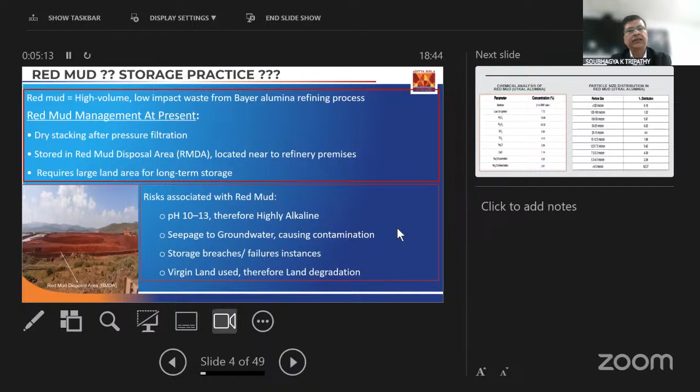Now to give an idea of chemical composition as well as particle size distribution, the characteristics of red mud show high iron content, almost in this Utkal sample case, 60% almost, sometimes plus 60 also. Al2O3, TiO2, SiO2, all these are there. Now the culprit is Na2O, which is around 2.84%, and I've shown the leachable and non-leachable portions.

It contains, after filter press, almost 22 to 25% moisture. Now the particle distribution shows 62% plus is less than 4.5 micron. Almost 90% is less than 75 micron, which shows it is quite fine-sized grain particles.

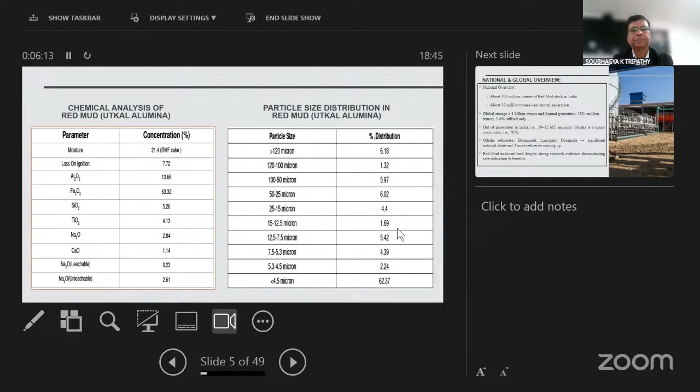Just to give a national and global overview, around 100 million tons of red mud is stockpiled in the country till date. 12 million tons generation generally happens across the country, where Odisha accounts for around 70% of this quantity. There are 3 refineries, Damanjodi, Lanjigarh, and Utkal Alumina Doraguda, and 3 more are already announced coming up. Global storage is huge, 4 billion tons, with annual generation of 180 million tons.

Only 3 to 4% is getting utilized, so which shows there is a concern. A lot of experiments and pilot studies are happening, but still there is low use.

But Hindalco has taken a lot of effort in this, and I will be proud to announce before this audience that out of 4 refineries, our 3 refineries, excluding the Utkal plant, are making 100% red mud utilization since the last 4 to 5 years. This has happened due to the COVID scenario and other incidents earlier. So cement plants are now catering to the maximum quantity of red mud for utilization, therefore all our 3 refineries are able to send it there.

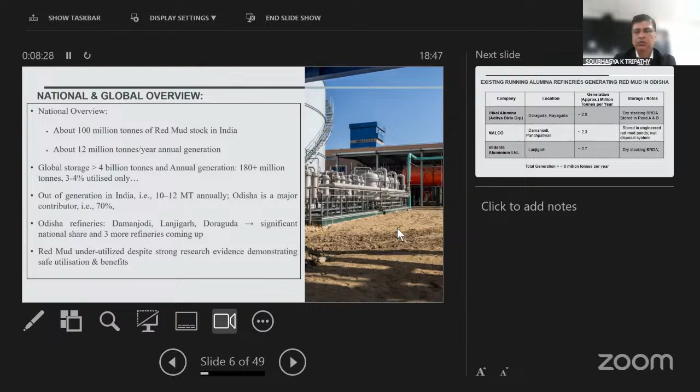This Utkal plant is remotely located, logistics is a challenge and many other things. Therefore, Hindalco is exploring other opportunities like mine backfilling, taking it back to the source where we got this mud, and also road utilization. Why these two, because the quantity is so much, we need some bulk utilization - bricks, some pavements. There are a lot of areas globally where uses are happening, but particularly these 2-3 uses will consume the maximum quantity, so we are putting thrust and emphasis on these type of uses.

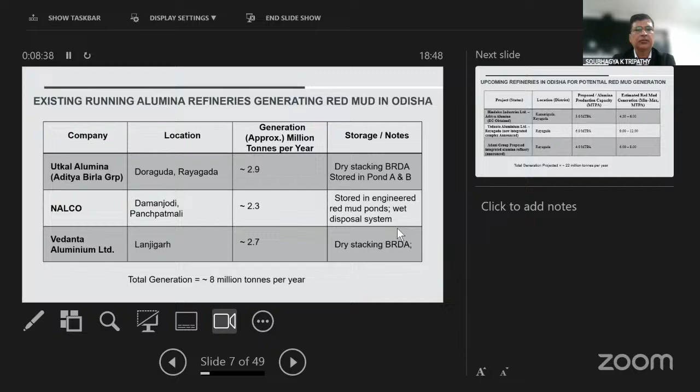Now, as I was describing, the 3 refineries are generating almost 8 million tons per year in the country, and it is projected to go up to 22 million tons if one refinery in Hindalco brings up a second one at Kansariguda, and Vedanta's new integrated complex which has been announced, and Adani Group if they come up, so it is going to increase further.

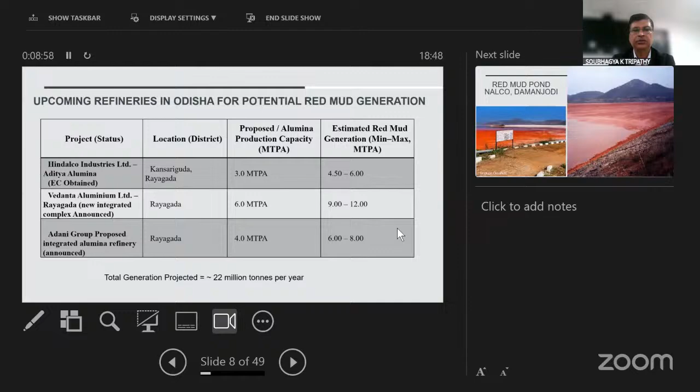Before I go into this opportunity of utilization, just to share these few photographs of Nalco, Damanjodi, where this was getting stored in slurry form. This was the practice earlier, almost all refineries. In Hindalco also, in Muri, Renukut, initial period of Utkal, they also did it like this.

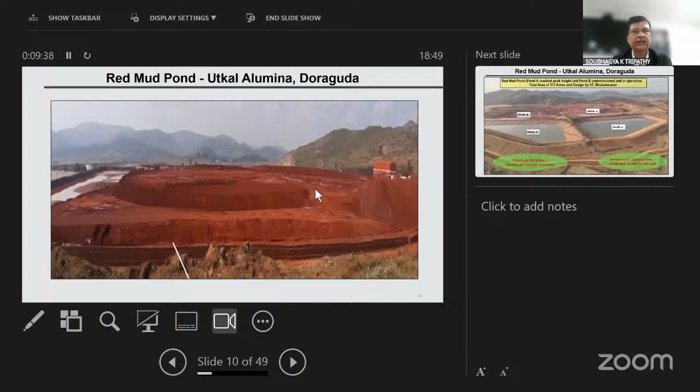Now, this is the storage happening at Utkal, dry stack storage. You can see there is a filter press at the northeast corner, and from there this dry mud is getting generated. Just giving a picture of this red mud storage area, drone view - around 500 acres of virgin land is consumed.

So there are 2 storage ponds, pond A and pond B. Pond A has almost reached the height, and pond B is again in process. To collect this, pond C is collecting the leachate, and that gets collected and taken to the plant for reuse in the process. Pond D is only a freshwater pond.

Now this Utkal plant, likewise all the 3 refineries, uses pressure filtration, which gives us the maximum caustic recovery, which is virtually the money - our investment gets recovered. So there is also many other risks associated with this storage.

Therefore, geotechnical stability tests are conducted at regular intervals. IIT Bhubaneswar, and in the initial period Golder Australia, were involved in designing this red mud storage, because there are many bad incidents which have happened earlier globally.

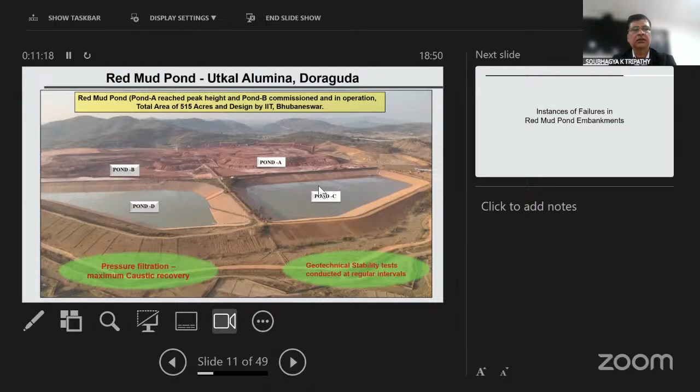So now what I'm going to show is this storage - this Utkal plant a few years back. There are old plants which again have red mud storage and concerns. This is going to pile up and increase, so instead of just storing it, our efforts have to be on getting other opportunities on how to maximize this utilization. That's my objective to present over here.

Like 2 instances, many are aware, but I'll just show - when in Hungary, one incident, a red mud breach happened where 10 people died, 150 injured.

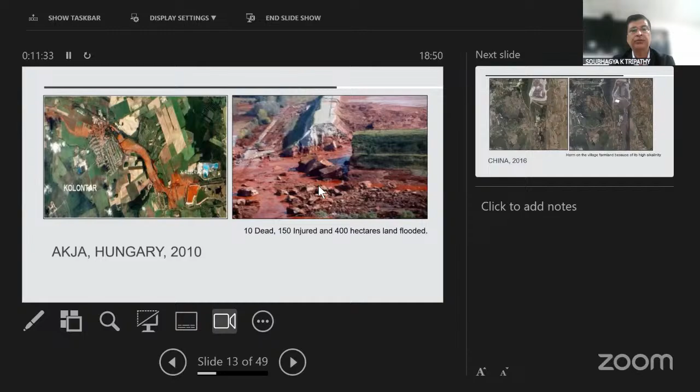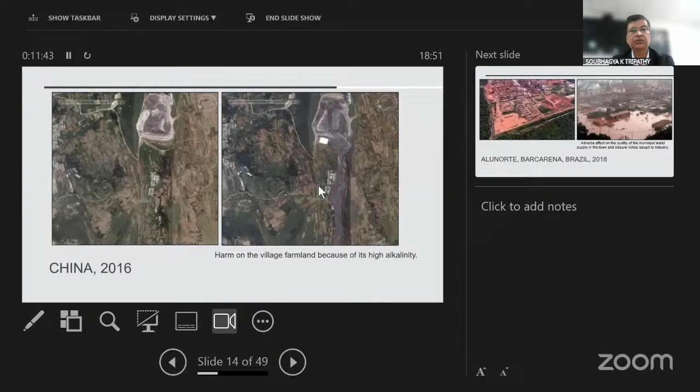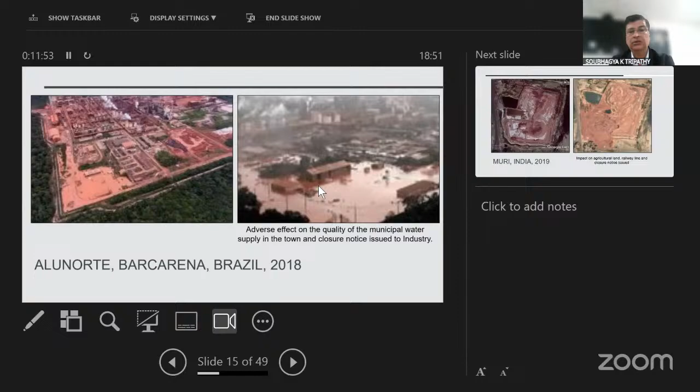Unfortunately, in our country also, Muri happened. But practically, there was no damage happening. There were concerns raised that a few agricultural lands could be impacted.

This brought a turning point in HINDALCO's approach and strategy to utilize red mud 100%. After this incident, 3 of our refineries made all efforts to utilize it in cement plants, including Muri. Muri survived and is now running well, 100%, even 100 plus, because the storage is also now being taken out.

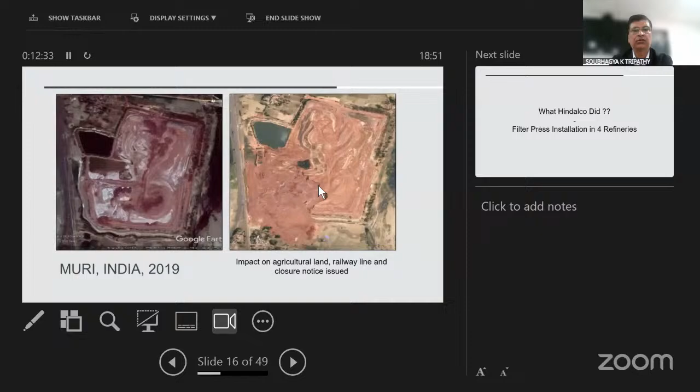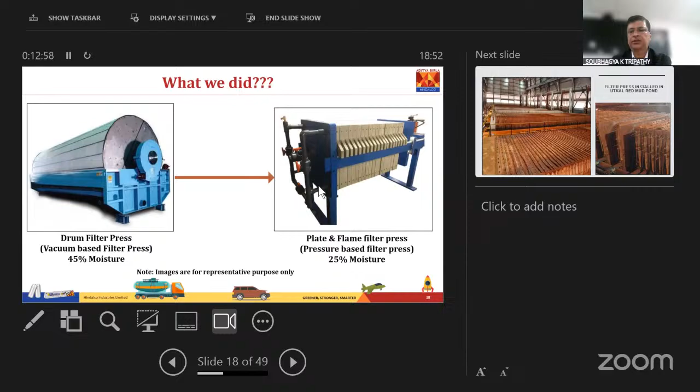So, turning this challenge into an opportunity, HINDALCO installed a pressure filter concept. Like the drum filter press, around 45% moisture was there in case of Muri, Renukut. It was completely revamped and changed into pressure filter form, where maximum 25% moisture will remain. Once moisture is reduced, it comes out in cake form.

Now you can see in the Utkal plant, and same in other refineries, these are the pressure filters with pressure plates. Red mud slurry passes through, and the membranes, these pressure plates, separate the solid and liquid. The caustic is collected and taken back to the plant, and the red mud comes out in cake form, going to the storage area. That's the practice happening now.

This change brought maximum caustic recovery up to 60%, reducing moisture from 60-65% down to 25%, which has brought in a lot of innovations like using it in roads and backfilling. These ideas came up, and many things were happening globally too. A lot of efforts went ahead, and it has clicked here.

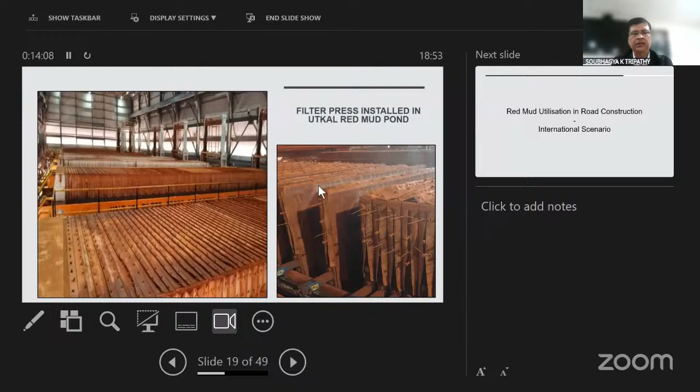The International Aluminium Institute has also recognized HINDALCO's efforts and published special volumes on how HINDALCO could change the scenario in utilizing red mud in 3 refineries to 100%.

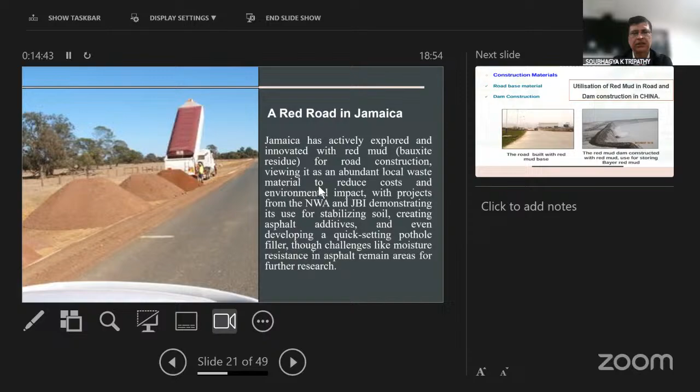Now I'll share a few global instances of red mud utilization in road construction. In Jamaica, they have made a lot of experiments in road construction, because they have abundant local waste material, resulting in cost reduction. There are a lot of publications, and in Jamaica's case you can see a success story on this road utilization.

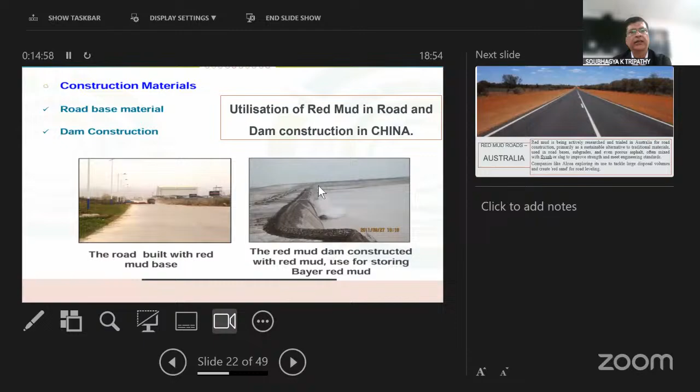In China also, they have used red mud base in dam construction - these are available online. In Australia, Alcoa has made efforts to actively use it, with a lot of trial utilization going ahead, particularly combining red mud with fly ash, which has clicked well and has more strength than using red mud alone.

In India, particularly in Odisha, red mud is successfully utilized in subgrade, subbase, embankments, and other permutations like stabilizing through fly ash. The performance of these roads is comparable, even superior, to soil or murum and other materials used in conventional roads.

So now the opportunity is that Odisha is expanding its infrastructure network, and natural resources like soil and murum are scarce. If anything could replace these materials, it's always a welcome step, and government authorities always encourage it.

I have found it - in Utkal Alumina, I would first cite this red mud used in roads. It was happening in piecemeal sections in many industries, but in case of Utkal, particularly HINDALCO plants, trial road use happened in Utkal and Muri, and the Indian Road Congress has issued accreditation to this use.

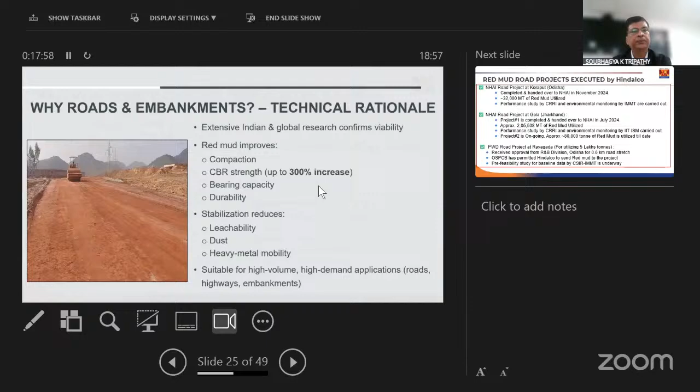These are the instances where HINDALCO has made efforts. I think other industries are also simultaneously making efforts. Like, as I said, the NHAI road project at Koraput, around 32,000 tons of red mud we have utilized, and this is completed, handed over to NHAI in 2024. The performance study has been done by the Central Road Research Institute, and environmental monitoring, baseline and subsequent monitoring, is happening through CSIR-IMMT, Bhubaneswar.

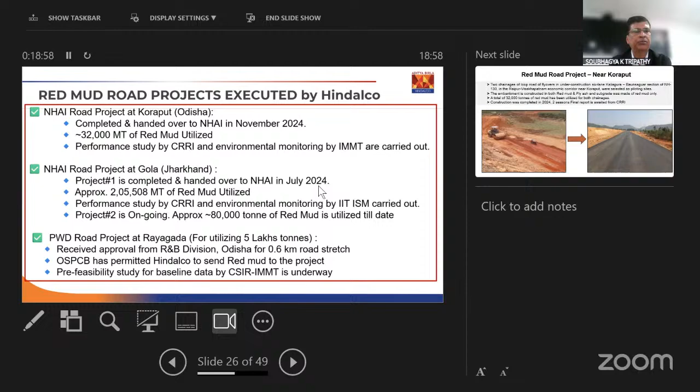Now, the NHAI road which is happening at Gola, Jharkhand, around 205,000 odd tons of red mud is utilized. Second patch, around 80,000 has gone, so that is also under progress. There is a PWD road near Rayagada, with an estimated usage of around 5 lakh tons. So that is also coming up, for which we have received permission from the Odisha Pollution Control Board. Pre-feasibility report and other things are completed, that is going to come.

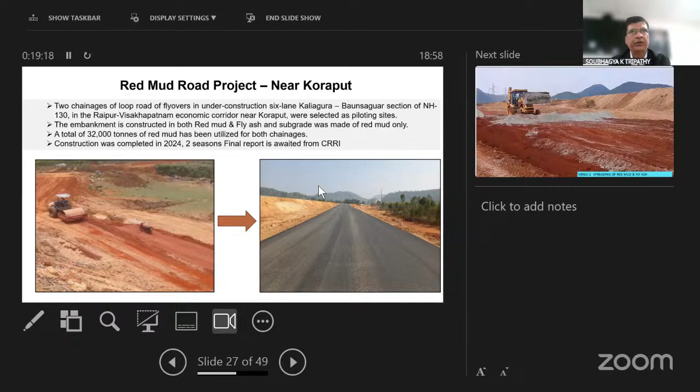Now, this case particularly, which is completed, is near Koraput, 2 chainages around 500 meters of length. So you can see the road before and after. There are 2 types of uses: one is subgrade use and another is embankment. A few photographs I will show one by one. You can see the laying of this red mud, and particularly this patch, we had to mix with fly ash and made another experiment to prove red mud with fly ash, and all design, performance monitoring, and guidance is by the Central Road Research Institute.

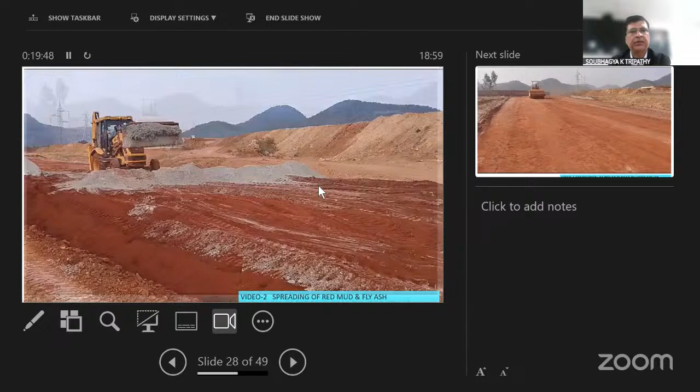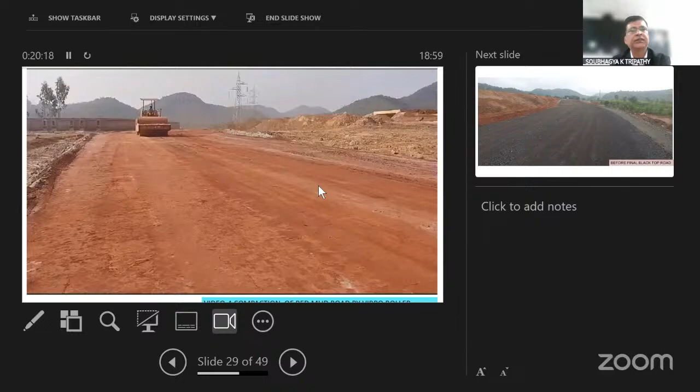Then you can see this compaction happening through vibro compactors around 8 to 10 times. One layer, let us assume 300 mm, will be laid through this JCB. Now with compaction, it almost comes down to 250 mm. 8 to 10 passes; the machine weighs maybe 8 to 10 tons, and then again it will give vibration. Likewise, one 250 mm layer will complete, and then the NHAI team will come and measure the performance. One is compaction strength that they will measure, and optimum moisture content also.

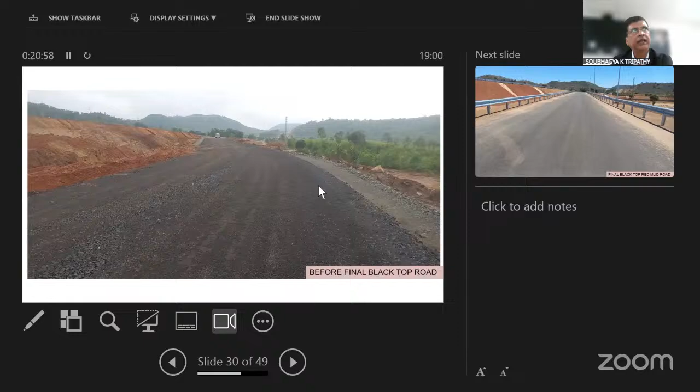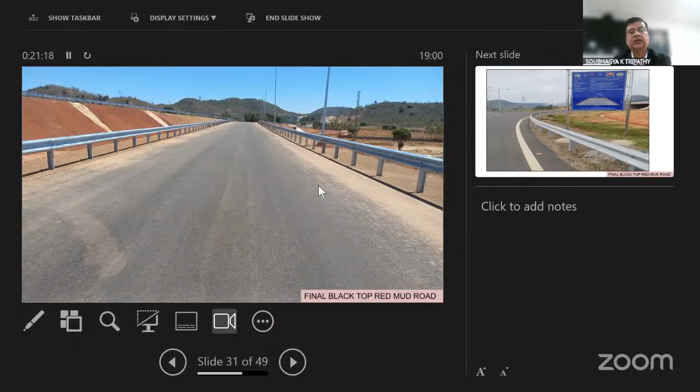This experiment is very carefully done with a particular moisture content. It works well. The OMC is coming around 19-20%. Here I was just sharing with you 20-25% after pressure filter recovery. Now if some drying up happens, then the whole strength and compaction works well. And you can see the final road, with the display board by all these authorities.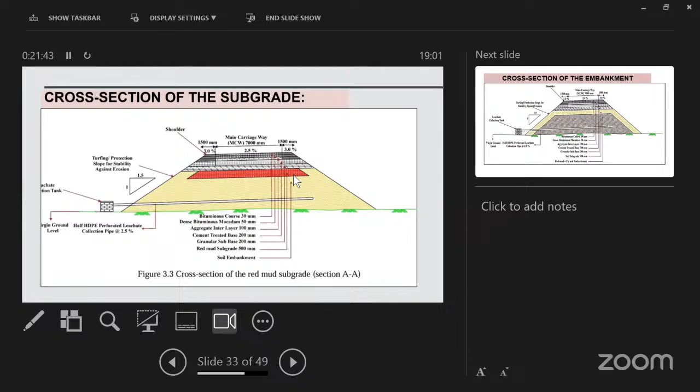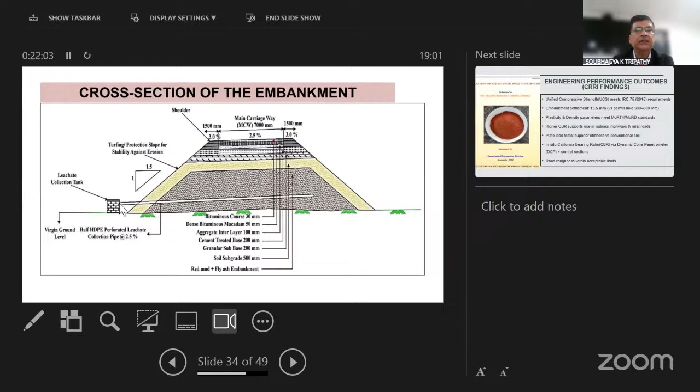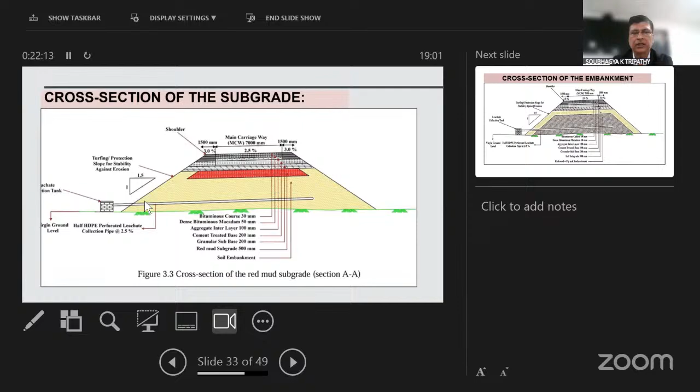Now, the engineering performance coming out of this experiment from CRRI: the UCS, Unconfined Compressive Strength, meets IRC guideline requirements. Embankment settlement is much less than permissible, 300 to 600 mm permissible, but max is 13.5. Plasticity and density parameters meet MoRTH, Ministry of Road Transport and Highways, and MoRD standards. Higher CBR supports use in national highways and rural roads.

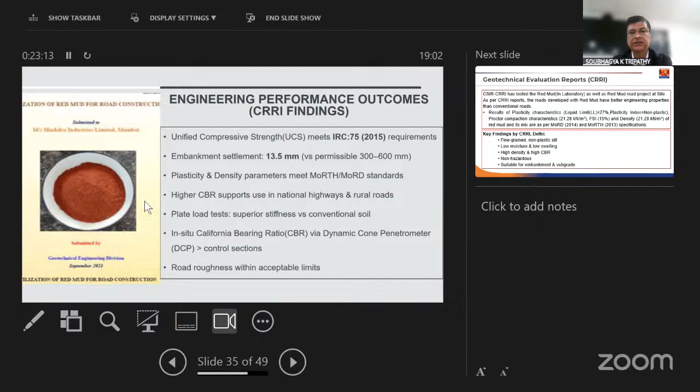Plate load tests they also conducted, showing superior stiffness versus conventional soil. In situ CBR and dynamic tests, like DCP, dynamic cone penetrometer, are much higher than control sections. Road roughness is also within acceptable limits. There are also a few more geotechnical tests they have done, like liquid limit, PI, FSI, and lots of other things.

So key findings by CRRI Delhi: red mud is fine-grained, non-plastic silt, low moisture, low swelling, high density, non-hazardous, and suitable for embankment and subgrade. That's the recommendation coming from CRRI.

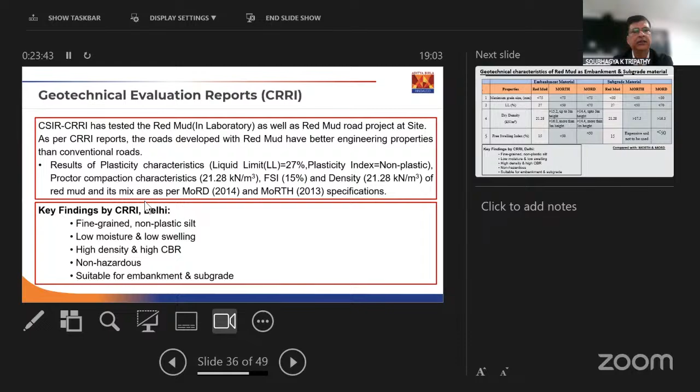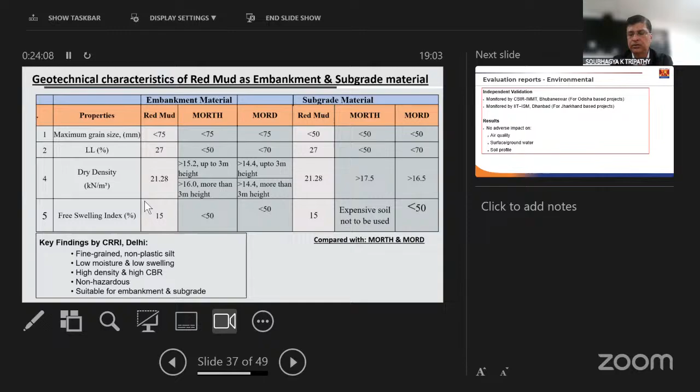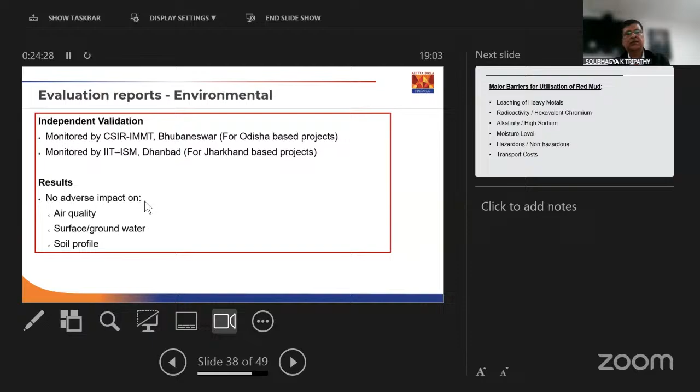Now, coming to the next concern, which is environmental. Generally, regulators see the risk associated, as I told earlier. So we have to be careful to assess what is happening here. The independent validation happened by CSIR-IMMT Bhubaneswar and IIT ISM Dhanbad. They have stated that till date there are no adverse impacts on air quality, surface and groundwater, and soil profile.

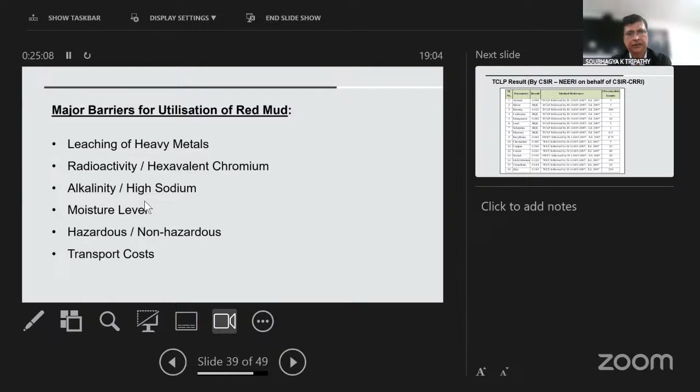So what is the major barrier? Why does red mud take so much time, so much storage, and it continues for so long? What is the major barrier? One is leaching of heavy metals. Once we figure out the challenges, then we can go to the solution. So we have analyzed each of the constraints, and I am going to describe how we have attempted to make it at least towards foolproof.

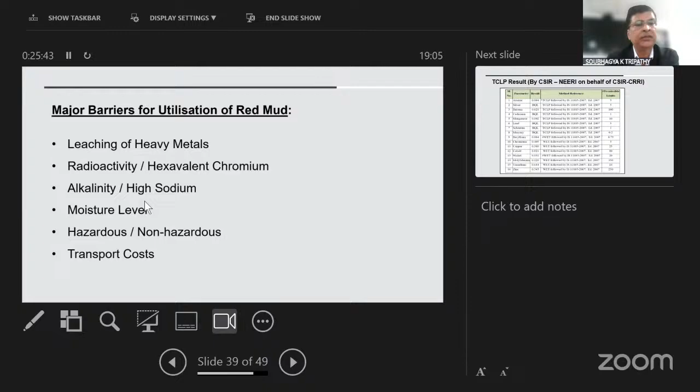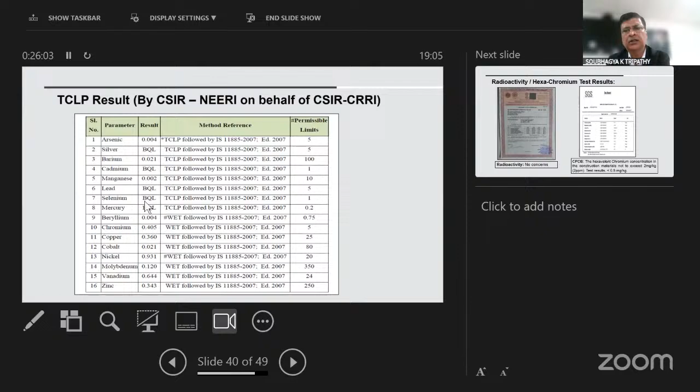Leaching of heavy metals, any radioactivity or hexavalent chromium, alkalinity like high sodium content, moisture level, whether it is hazardous or non-hazardous, and the economic sense, the transport cost. That's the biggest challenge. Now, the TCLP results, which CSIR-NEERI have done, said there is no concern for leaching of heavy metals. We have conducted many other tests in many laboratories. So heavy metal leaching, particularly after compaction, has no chance.

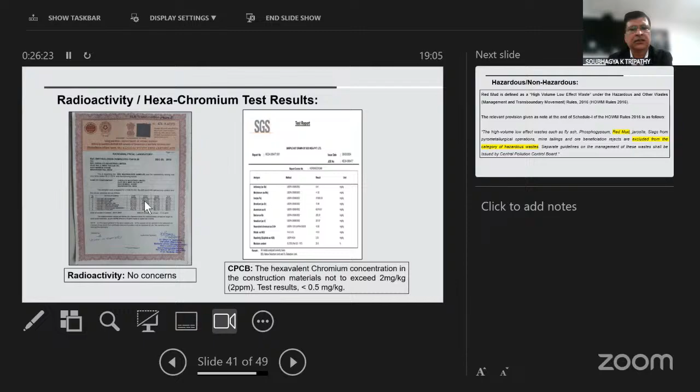Now, radioactivity: we have tested, no concern. Hexavalent chromium: the limit stated in the CPCB guideline is 2 mg per kg, and through SGS and other bodies we have found it is less than 0.5. So no concerns. Hazardous or non-hazardous: this is high volume, low effect waste mentioned in the Hazardous and Other Wastes (Management and Transboundary Movement) Rules 2016, which state that red mud is excluded from the category of hazardous waste. No hazard.

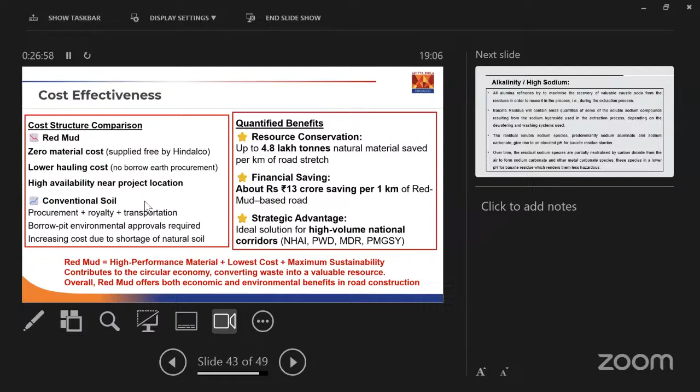Now next, cost effectiveness. Let us say we are using red mud in place of conventional soil. For soil, NHAI has to pay for procurement, royalty, transportation from the pit, and the approvals required. And natural soil is always a constraint. Since we supply red mud at zero material cost, with lower hauling cost, and high availability in nearby areas in southern Odisha where roads are coming up, availability is plenty.

In this particular case, we calculated the cost. For us, cost is secondary, but just to showcase, 4.8 lakh tons of natural material is saved, around 13 crores per kilometer saving. It is site specific; it will not always happen, but whenever there is embankment, that cost saving happens. So we prove it is a high performance material, lowest cost, maximum sustainability, and contributes to the circular economy, converting waste into valuable resources. Overall, red mud offers both economic and environmental benefits in road construction.

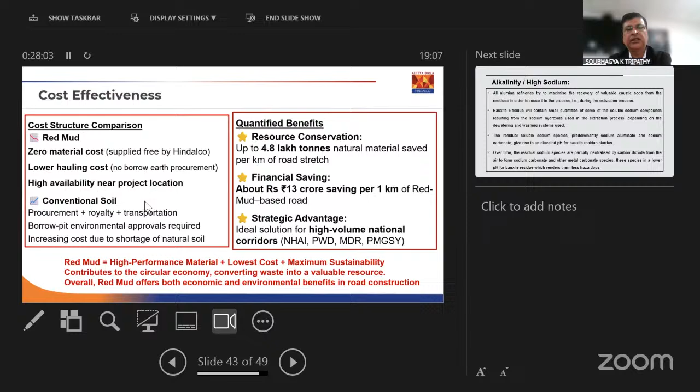Now, one question is how to address the alkalinity, the high sodium. Two things. One, as I said initially, pressure filtration reduces the caustic content. Whatever caustic content remains is a small quantity; I showed you 2.63. Only around 6-7% is leachable. Basically it is sodium hydroxide, sodium aluminate, sodium carbonate. In due course, some sodium also reacts with atmospheric carbon dioxide, so it reduces over time.

Whatever we do, we cannot make it neutral. Red mud cannot be made neutral. So we are attempting to at least keep it from coming into contact with water. That's the whole idea of the two sections I showed you. One, when it is inside the subgrade between two layers, water contamination chances are less. Second, in the embankment, there is plenty of soil cover, safety, a slope criterion of 1 to 1.5, and particularly NHAI's compaction process: one layer is certified, then they go to the next layer, because ultimately the maintenance is on the agency carrying out the whole NHAI road construction.

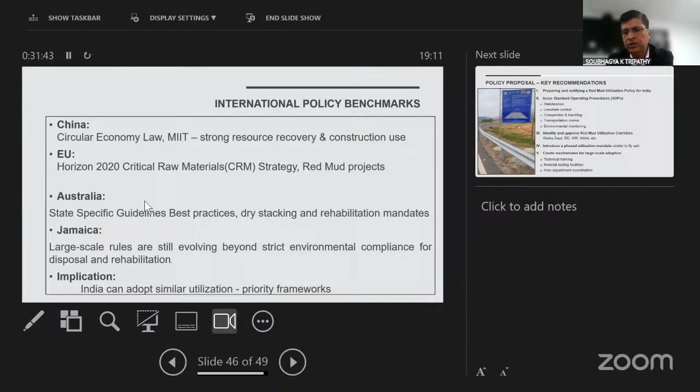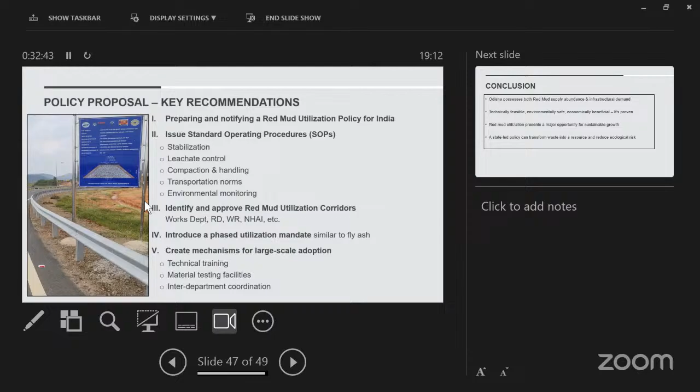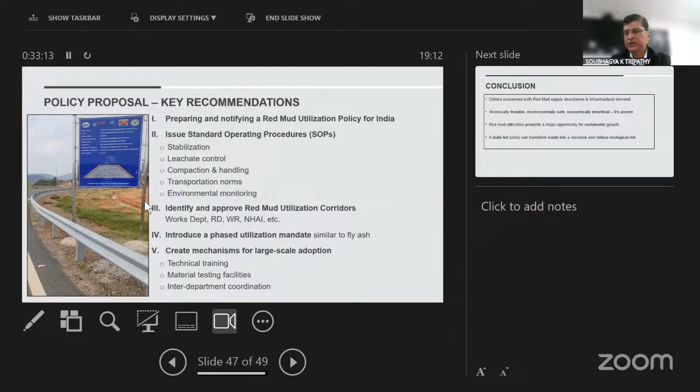So the avenues where utilization can happen, like the works department, RD, NHAI, all these have to be roped in, and their views as well as their efforts are required on this front. We'll make a utilization mandate in a phased manner, initially low, gradually scaling up, and create mechanisms for large-scale adoption like technical training, material testing facilities and interdepartment coordination. All these are always required with any new policy.

So to conclude, Odisha possesses both red mud supply abundance and infrastructure demand. Red mud use is technically feasible, environmentally safe and economically beneficial; it is proven now. So red mud utilization presents a major opportunity for sustainable growth. A state-led policy may help the nation come out with a policy, transform waste into a resource and reduce ecological risk.